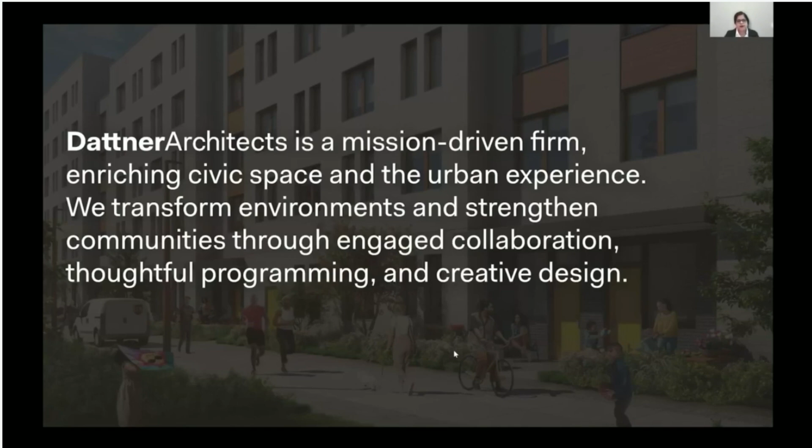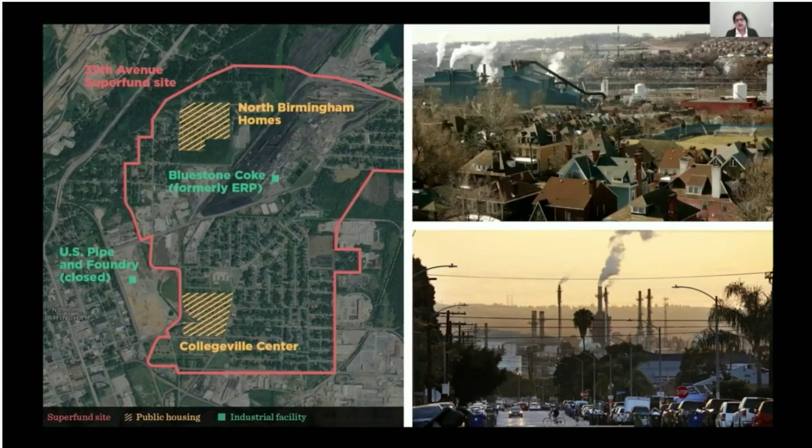One of the things I've always been really interested about, and one of the reasons I got into architecture, is this idea of affordable housing and how oftentimes it gets built in these really undesirable locations. These are generic images of housing that's built often near plants or on a Superfund site. This isn't only an issue across the country with smaller single-family homes, but also in New York City. There, the stereotype of affordable housing is these large towers with underutilized parks and playgrounds around them near treatment plants.

I think this is nothing about intention. The intention is always there. There's this acknowledgement that we have to provide affordable housing, but we're kind of forced into these places because the land is cheap there, because they are undesirable. So one of the things I wanted to talk about today is how can we use Passive House to address some of these inequities, historical inequities, and how affordable housing often gets sited.

The project I wanted to talk about today is Alafia. It's this 25-acre master plan project in Brooklyn, New York. I recognize how fortunate we are to look at a master plan project in New York City, but I also think this idea of a master plan and how we could impact change in a very large-scale way using Passive House principles is something that might resonate with more of you on this broadcast. Alafia is a Yoruba word that means peace, health, and well-being.

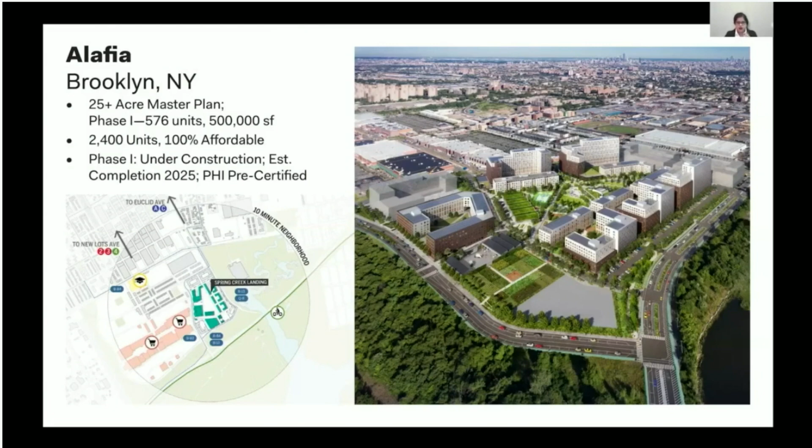So we are not immune from this idea of undesirable sites. You can see the site here highlighted in red, and I've circled some of these less desirable things around our site. There's a wastewater treatment plant, a bus depot, we're around manufacturing districts, and we're also immediately adjacent to a highway. There is a park, but it's on the other side of the highway, so you have to figure out how to cross it to get there. This is true for a lot of affordable housing sites—we get the last sites that are left, and there's a reason these are the last sites that are left.

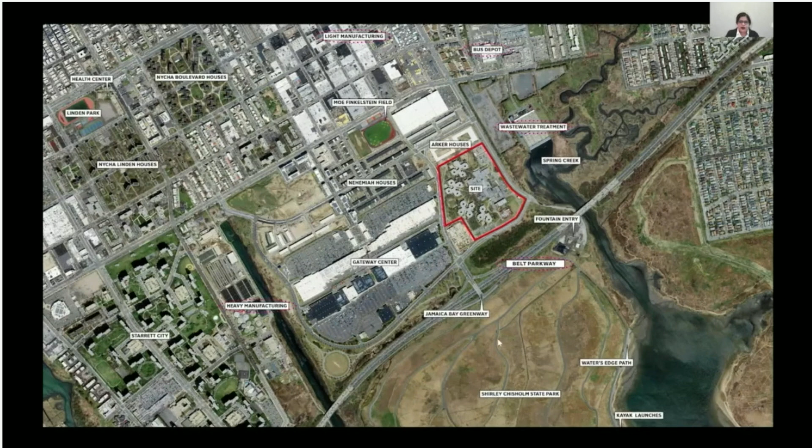So our context kind of varies. We're adjacent to a suburban-style shopping center. We have both highly dense, large-scale housing projects as well as low-rise housing projects. And as I mentioned earlier, we are adjacent to a highway. So the idea here was, how can we address all of this from a master plan point of view and also from a building point of view?

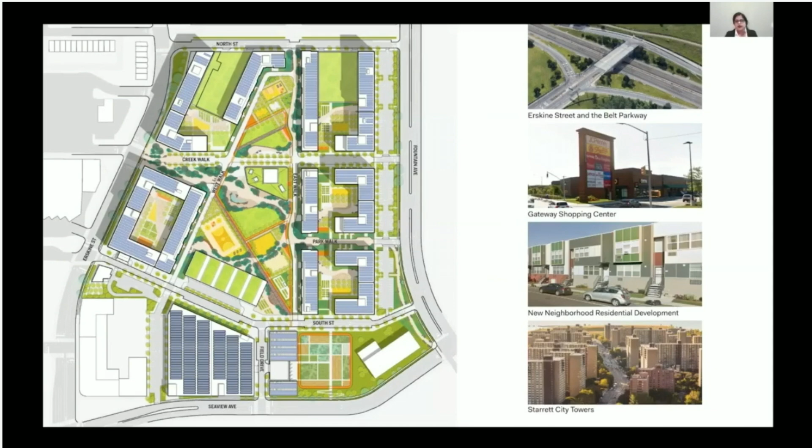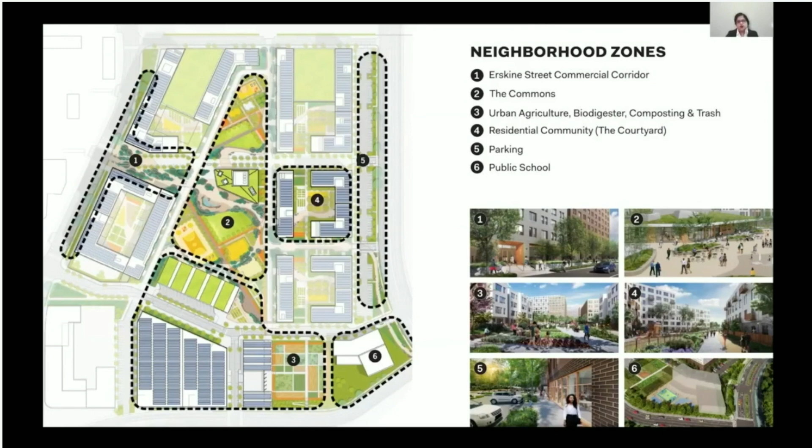So we developed these zones in this neighborhood that really speak to the context surrounding it. For example, Area 1 is the commercial corridor immediately adjacent to that suburban-style plaza I mentioned earlier. And Area 5, which is the parking area, is adjacent to the highway to provide an additional buffer and to clearly delineate where vehicles would stay for those visiting and living in this neighborhood.

And so the master plan was developed to emphasize these three identities at three scales. The neighborhood identity gives you a sense of place and connection to the city at large and the immediate context. The community identity allows people to feel a sense of ownership and pride in these spaces created as part of the master plan, such as the parks, that everyone has access to. And then obviously the personal identity, so that everyone here feels like they have a home and a safe, secure place to live.

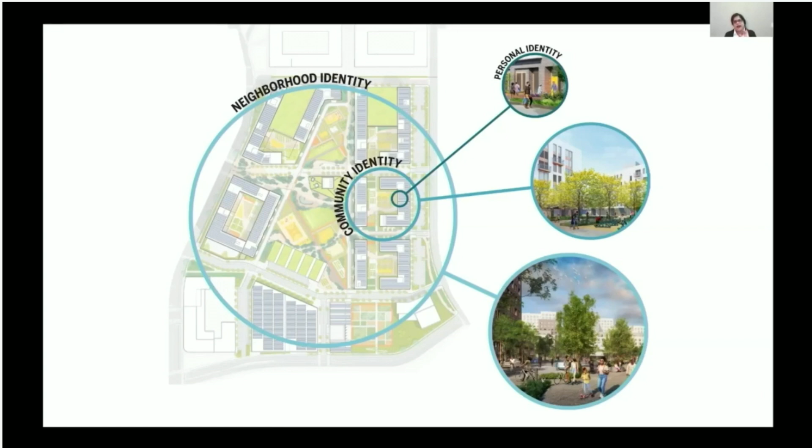So before we get into the passive house stuff, just this idea of how we can take this concept of passive house, which allows us to emphasize health and wellness, and apply it at a larger scale. There's this whole idea of site access and connectivity, clearly delineating pedestrian zones and vehicular zones so it's clear this is intended to be a pedestrian-friendly space, a neighborhood where you don't really need a car to get around. Honestly, that's true for a lot of New York City, but isn't true for everywhere, isn't true for a lot of neighborhoods across the world.

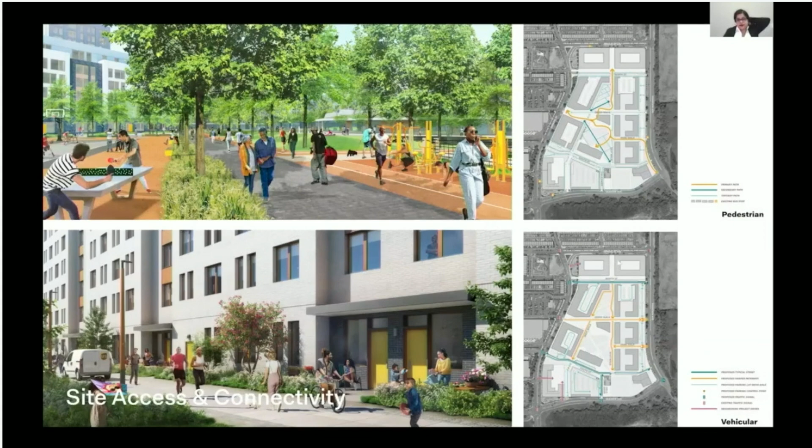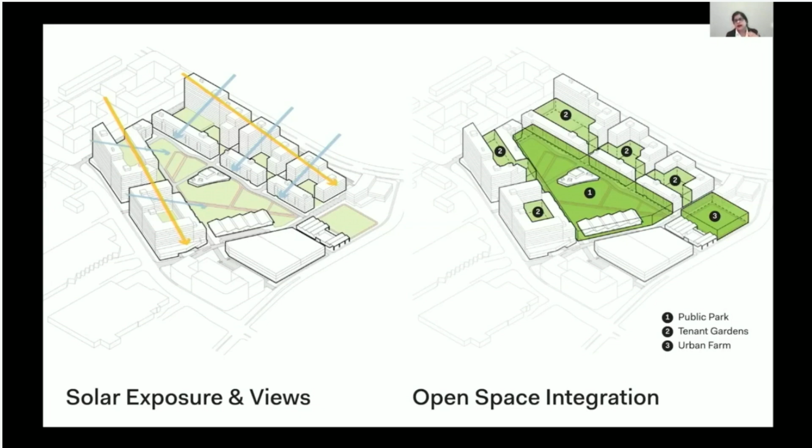This also helped inform these green zones. So there's passive spaces, active spaces, and agriculture that really close the loop on this emphasis on health and wellness, the idea being that we want people to come out of their homes and have a place where they can be, that's appropriate for the wide variety of people we anticipate living here, whether it's seniors or people with kids, so there's always something to do.

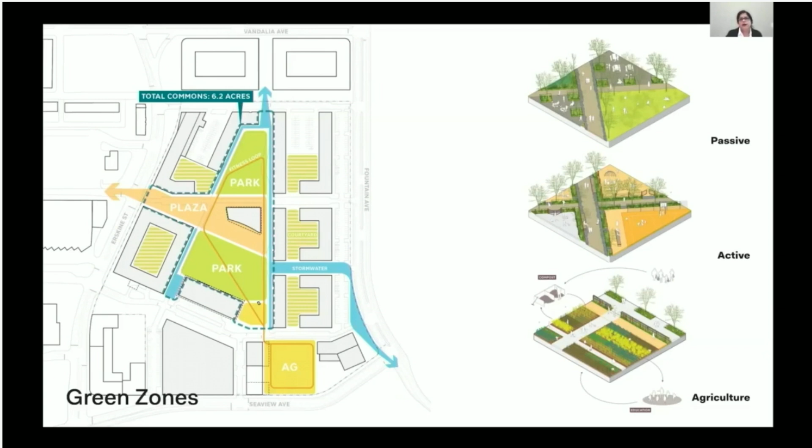And the agriculture part really helps address the fact that this is somewhat of a food desert, that there aren't a lot of great healthy food options nearby. Often when we're creating a master plan, we get to say oh yes, there will be retail here, but is there a way to allow residents to feel more connected to how their food is grown, and have more direct access to the food that they eat?

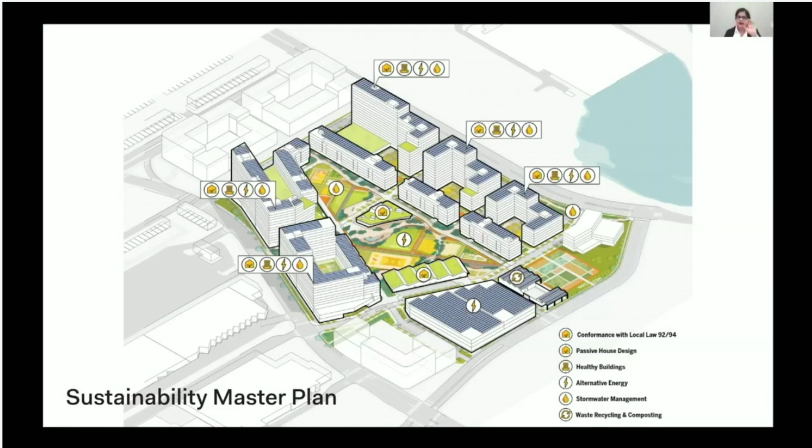So all of this goes, and I think the interest of the people watching this is, how does this relate to the sustainability master plan? I like to consider sustainability very holistically. So it's health and wellness, it's energy consumption, so it's operational carbon, it's embodied carbon, but it's also resiliency. And we are adjacent to the water.

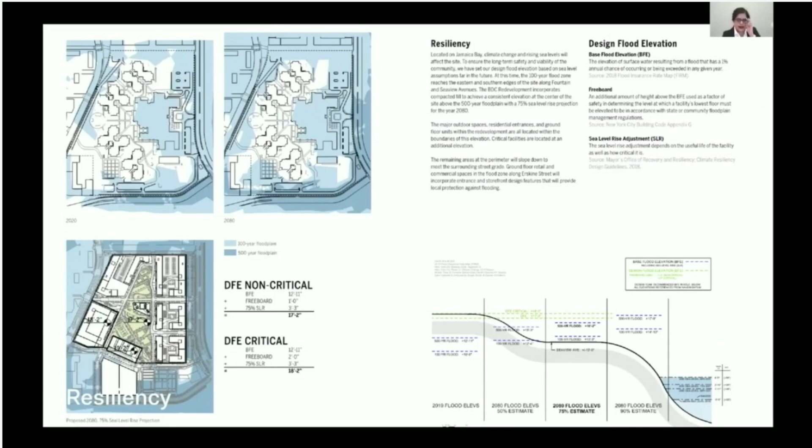The next few images are just renderings of the project, but part of the site being in a floodplain meant there were many stormwater management measures that needed to be incorporated, including bioswales, and working closely with the landscape architect to ensure that all the landscaping worked toward the goal of reducing the surface flow of stormwater. We also included a number of rain gardens, and all of this works really well with this concept of the plaza and commons at the center of the project.

The Sustainability Master Plan also included provisions for green roofs and solar arrays at the roofs of the buildings.

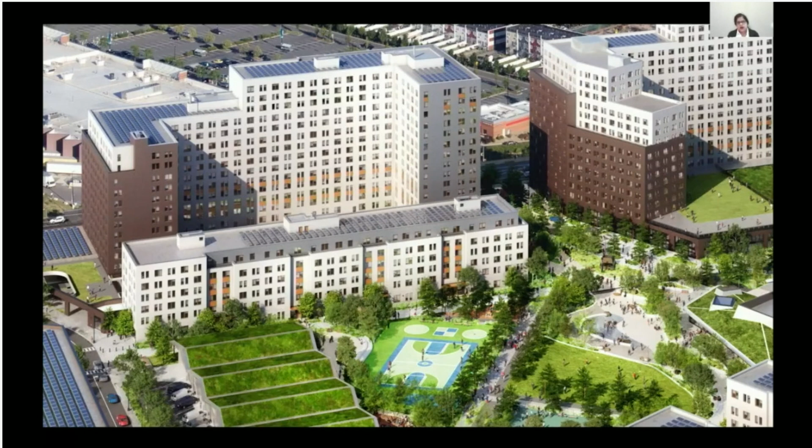So not only does this comply with local New York City code, but it also helps offset our operational carbon, which is something that we look to quite closely when we talk about passive house projects. The other sources of renewable energy that we have as part of this are geothermal for heating and cooling, and also a biodigester that's included as part of this waste management facility.

The site is very far from existing infrastructure, so part of what we did was try to make it kind of standalone, to make a microgrid that serves the buildings and helps reduce our site EUI for each individual project, and also to have a central place for trash where DSNY, the local Department of Sanitation in New York, can come and pick up the trash. It also makes sure we're collecting a variety of waste streams, including organics, and some of the compost from that feeds back into the urban farm from the agriculture portion I spoke about earlier.

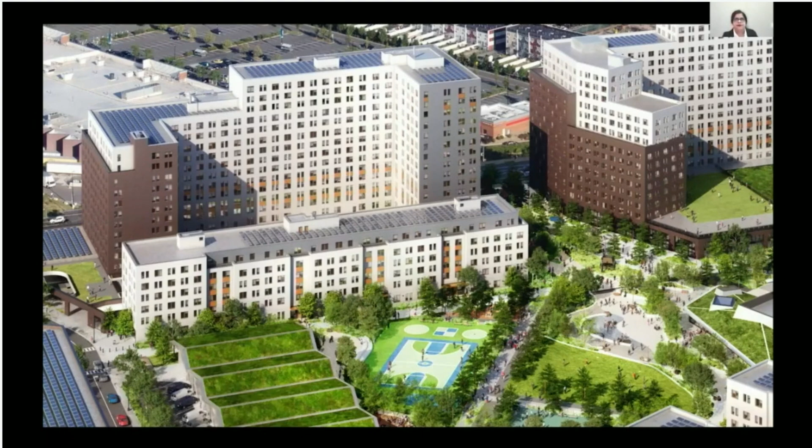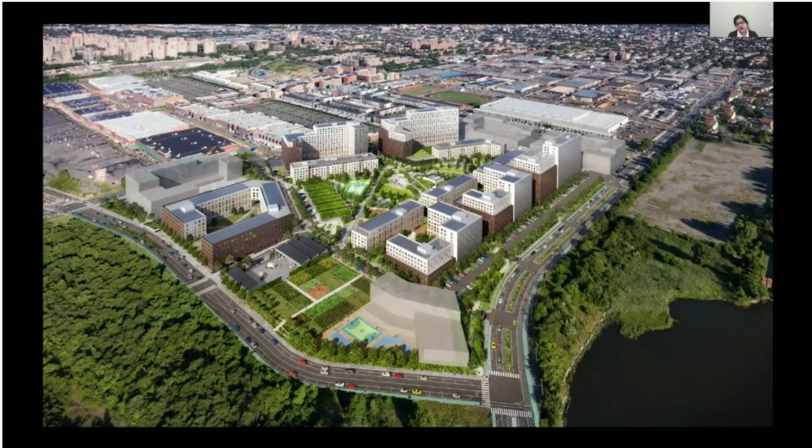the place where we have the most potential impact here is mandating that all future buildings are designed and built to passive house standards. I think this idea of passive house, sometimes we look at it and see that it's really about reducing energy consumption, and all of the things that we do, the building tightness, the attention to detailing and air sealing, all helps reduce infiltration and impacts our energy use.

But there's also this entire indoor health component to it, right? We're bringing in tempered, filtered, fresh air into every habitable space, and that really helps address all of these new quote unquote forms of extreme climate change that we're seeing.

Last summer, New York City was blanketed with smoke from Canadian wildfires, which is something we would have never in a million years thought we'd have to deal with. We found that our passive house buildings did, by and large, pretty well. Tenants did not really complain about smoke coming into their apartments. They didn't have to worry about particulates.

And I live in New York City, and during that time, even though all of our windows were shut, there was a lot of dust in our apartment. So I think this idea that yes, we want to reduce our energy consumption, but there is a big health and wellness benefit to this.

It also helps filter out noise for many of these sites that are built adjacent to a highway or built in very loud manufacturing areas. And...

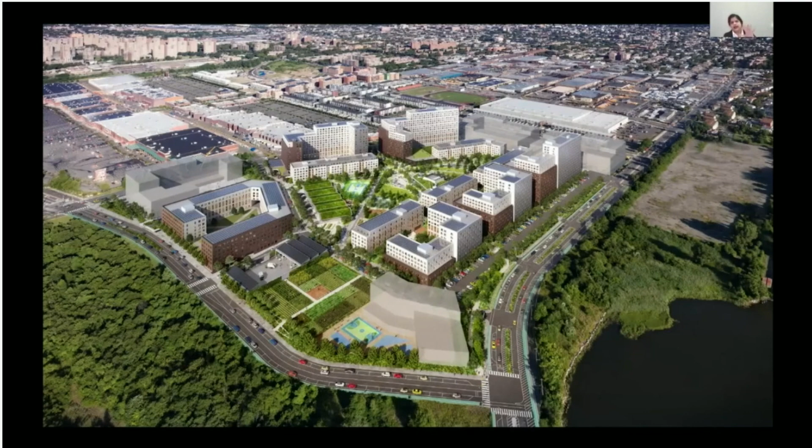So phase one is under construction right now. It includes 3 buildings and a lot of the infrastructure, the roadway work, a lot of that stormwater work that I was speaking about earlier.

And the interesting thing about this one that I think might be compelling to some of the people listening is that this project, the larger scale building in the background, even though it's 2 buildings, is going to be tested for the blower door test as one volume, and will be the largest blower door test by volume in North America when it is tested, which I thought was really fascinating. So I hope you guys also find that really interesting.

And it's going to be designed to PHIUS standards. It's already PHIUS pre-certified, and I think that's also really interesting, because many of the projects we talk about in New York City are designed to PHIUS standards, which is more forgiving to the temperate zone of New York City.

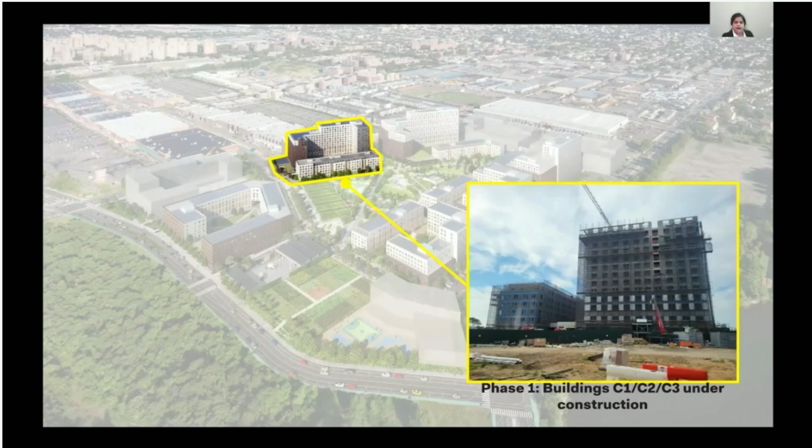And that's kind of it. I really hope that if you take anything away from this, it's this idea that we can apply passive house principles to not only individual building solutions, but large scale solutions, and therefore have a bigger impact to not only the communities in which we build, but to the world at large.